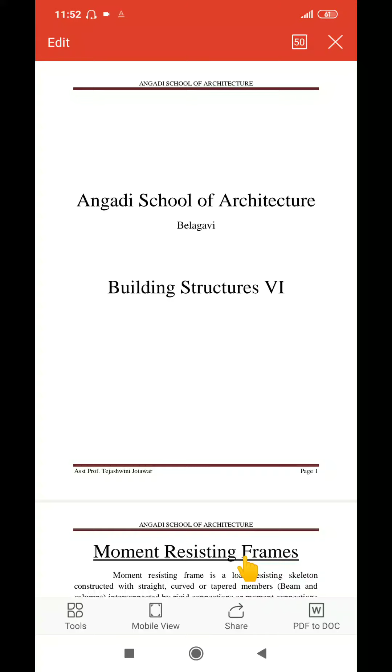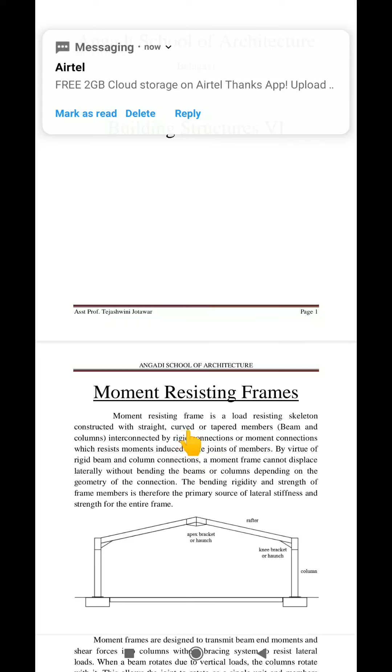Moment resisting frame is a load resisting skeleton constructed with straight, curved or tapered members. Beams and columns are interconnected by a rigid connection or moment connection which resists the moment induced at the joints of the member. So moment resisting frames have nothing but a combination of beams and columns in such a way that the connection between a beam and a column is a rigid or moment connection, capable of transferring the moments induced in the beam to the column efficiently.

By virtue of a rigid beam and column connection, a moment frame cannot displace laterally without bending the beams or columns depending upon the geometry of the connection. So whenever a lateral load is applied on a connection or frame, these joints are much more efficient than simply supported or simple beam and column joints.

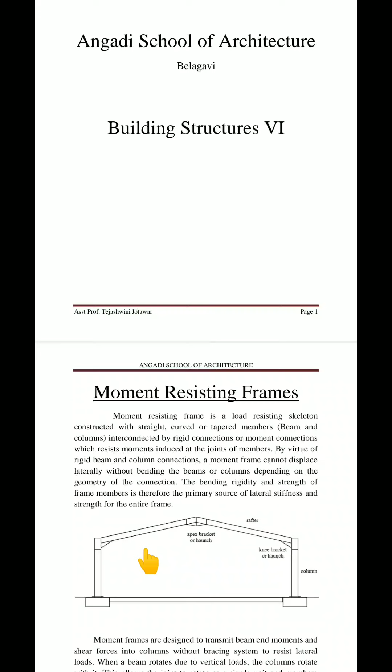Moment frames are designed to transmit beam end moments and shear forces into the columns without the need of a bracing system to resist lateral loads. So the end moments and shear forces induced in the beams can be transferred from the beam to the column without any need of further bracing arrangements.

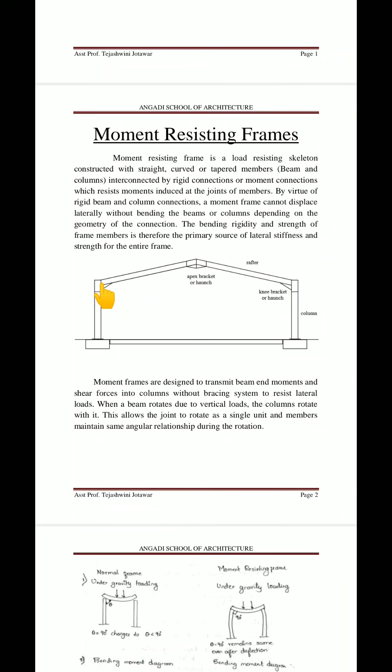These are the basic differences between a normal frame, which is a simple beam and column frame, and a moment resisting frame. Suppose there is a gravity load applied on a normal, simply supported frame type, then the beam will deflect in this way. Because of this deflection, moments will occur in the beam, but those moments will not be transferred to the columns, causing a change in the angle between the beam and column, which leads to destruction of the joint.

Whereas if it is a moment resisting frame, the load applied will cause moments in the beams, and these beam end moments will be transferred to the columns. So the deflection of the beam and column will be such that the angle relation between the beam and column joint remains the same, that is 90 degrees. If it was previously 90 degrees, then even after the deflection or transfer of moments it remains 90 degrees, and because of this there won't be excessive destruction to the frame overall.

Second difference is the bending moment diagram. This is a simple bending moment diagram for a normal beam column joint, whereas this is the bending moment diagram representing a moment resisting frame under lateral loads.

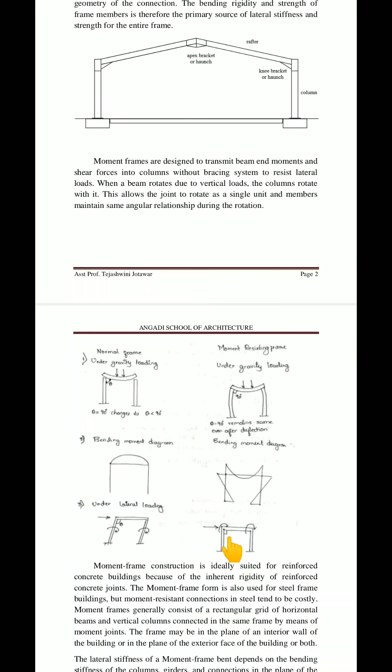Whenever there is a lateral load applied on a normal frame, the column will displace, or sway, and because of that the angle also changes between the beam and column junction, which might cause failure in the joint. But whenever a lateral load is applied on a moment resisting beam and column, a moment will be created which is transferred from beam to column, and hence the joint remains intact and the member does not fail under lateral loading.

This is a representative diagram showing the deflection of beams and columns. Whenever there is a lateral load applied from left to right, there will be a convex and concave deflection in beams as well as columns as shown in this figure, which represents a single rigid joint connection.

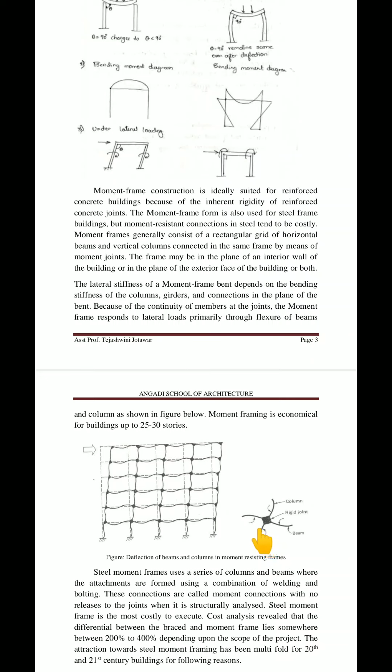There will be an anti-clockwise movement on one side of the joint and clockwise movement on the other side. Similarly in columns, anti-clockwise on one side and clockwise on the other. Because of this interrelation between beam and column, the moments induced in the beam are transferred to the column, and the column transfers those moments to the foundation, so the relation between beam and column remains intact and the joint does not fail under the loading condition.

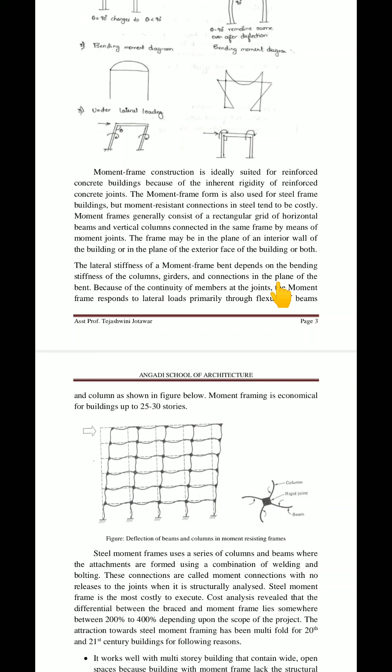Because of all these reasons, moment frames are economical for buildings up to 25 to 30 stories, only if we are using a single lateral load resisting system as moment frames. These are usually preferred for concrete structures because of the inherent nature of concrete for rigid connections.

Whereas if we use the same moment resisting frame type for a steel structure, though these are efficient enough, they will be costlier. Cost analysis revealed that the differential between a braced frame and a moment frame lies somewhere between 200 to 400 percent depending upon the scope of the project. So when we compare a moment frame with a braced frame, the analysis reveals that it is almost 2 to 4 times more than braced frame structures.

But even due to all these drawbacks, even for 20th and 21st century modern day buildings, we prefer a moment resisting frame because of some of the reasons as follows.

It works well with multi-story buildings that contain wide open space. With a moment frame lacking structural walls, vertical diagonal braces as in case of braced frame, or a shear wall system, we can use moment frames for very wide open spaces without causing any interruptions.

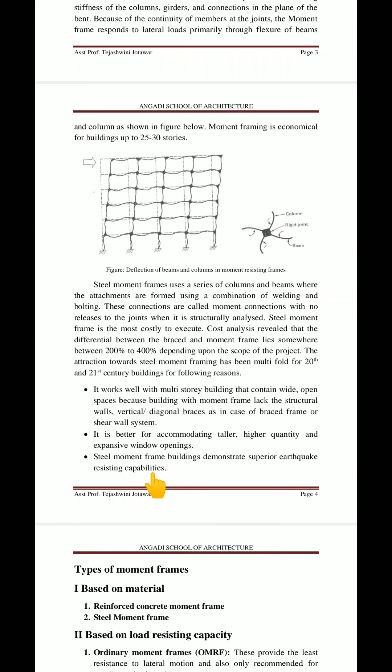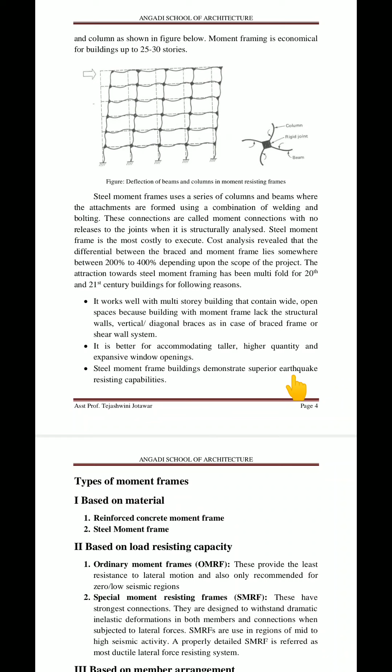Steel moment frame buildings demonstrate superior earthquake resisting capacities because of the inherent ductility property of steel, and the ease in connection for beam and column joints. Steel gives better resistance capabilities in case of reversible loads, seismic loads, or earthquake loads.

Let us study the types of moment frames. Moment frames can be classified based on material as reinforced concrete moment frames or steel moment frames. In reinforced concrete moment frames, we can have cast in situ or precast members. Steel moment frames can have regular rolled steel sections, combined sections, or composite sections.

The second type of classification is based on load resisting capacities. Here we have two types: ordinary moment resisting frame, OMRF type, and special moment resisting frame, SMRF type.

Ordinary moment resisting frames provide the least resistance to lateral motion and are only recommended for zero or low seismic regions. So we can use this type of moment resisting frame for very least lateral motions, or wherever zero or low seismic regions are present.

Special moment resisting frames are stronger compared to OMRF types. They are designed to withstand dramatic inelastic deformation in both members as well as connections when subjected to lateral forces. SMRFs are used in mid to high seismic activities, and a properly detailed SMRF is referred to as the most ductile lateral force resisting system.

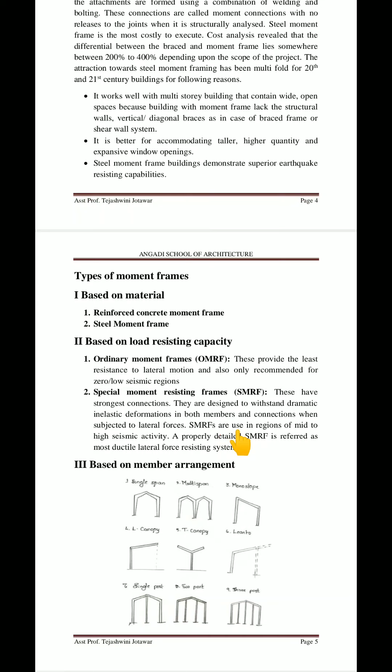As per the Indian standard codal provision IS 1893, moment resisting frames which are designed and detailed as per IS 13920 are referred to as SMRF type, or ductile moment resisting frame.

The third classification is based on member arrangement. We can have single span, multi-span, monoslope, L canopy, T canopy, lean-to, or single post, two post, or three post type of moment resisting frames.

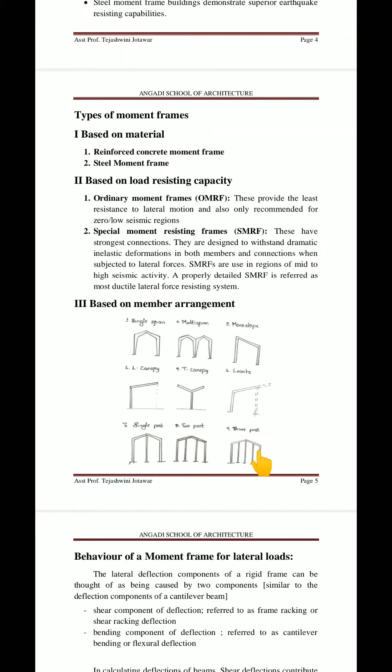These can be of a single story or two to three stories at the maximum, whereas in case of multi-story buildings, we go for such arrangements - this type of arrangement we prefer.

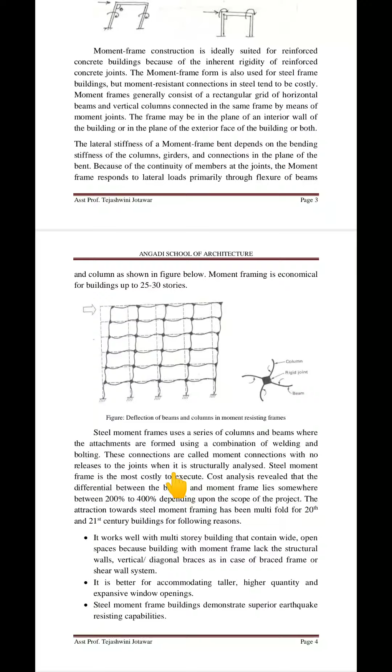Now, behavior of moment frames under lateral loads. The lateral deflection components of a rigid frame can be thought of as being caused by two components: one is the shear component of deflection, and another is the bending component of deflection.

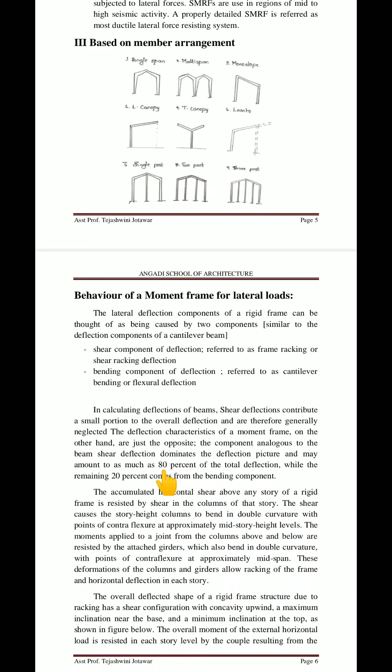For deflection of a beam, shear deflection contributes a small portion to overall deflection, whereas bending deflection covers a maximum portion. It is in the range of a 20 to 80 ratio.

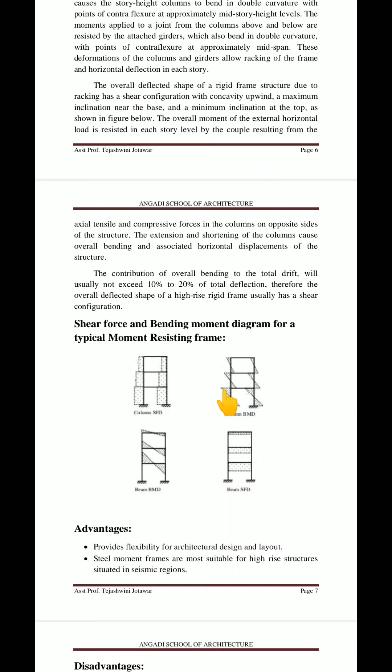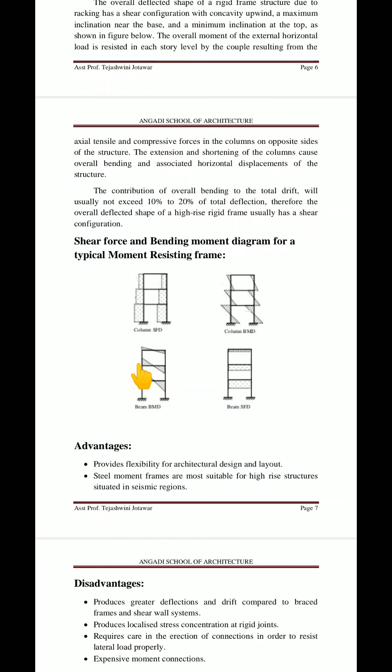These are the bending moment diagrams for beams and columns. Whenever a load is applied, there will be a maximum positive bending moment at the top and a maximum negative bending moment at the bottom. Similarly, on the beams, one end will have a maximum positive bending moment and the other end will have a maximum negative bending moment.

Advantages of moment resisting frames: these provide flexibility for architectural design and layout, because they can be adopted for very huge spans as well as height. Steel moment frames are most suitable for high-rise structures

situated in seismic regions. Disadvantages are these produce deflections and drift compared to braced frames and shear walls. The deflection and drift produced by moment frames are comparatively higher when compared to braced frames and shear walls, so for lateral load resisting systems, we can go for braced frame and shear wall rather than a moment resisting frame.

They produce localized stress concentration at rigid joints. Wherever rigid joints are provided, at that section there will be a concentration of stresses which may fail the rigid connection if proper detailing is not done.

They require care in the erection of connections in order to resist lateral load properly. Connection details have to be done properly, and therefore skilled labor is required. Moment connections are expensive - the joint connections or rigid connections provided especially for steel frames are very expensive or costly.

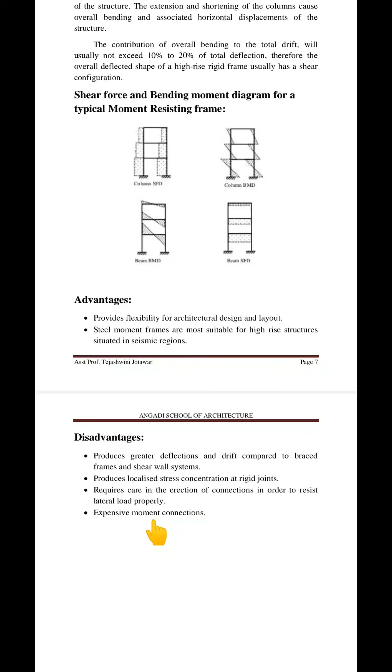So this is a brief introduction about moment resisting frames. Thank you.